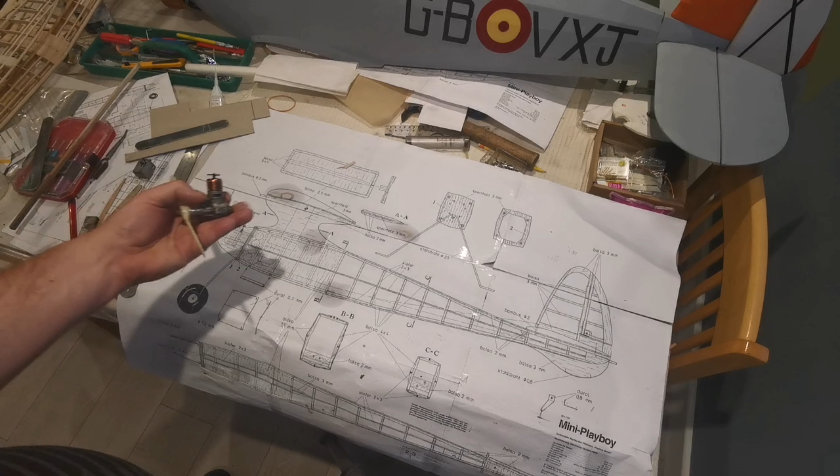It's time to start tackling the fuselage, and the first thing I have to do is decide the power plant. In this case I'd like to make use of this lovely little DC 0.75 Merlin. I've had this engine since I was about 15 or 16, and I'd like to make use of it as a nod to nostalgia.

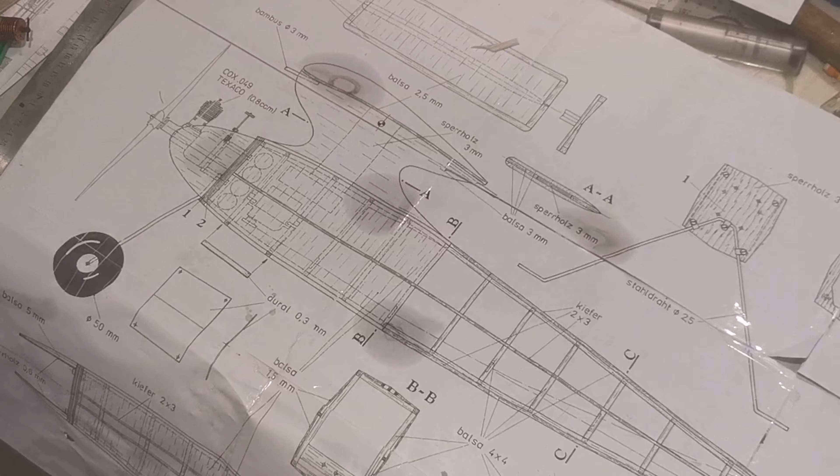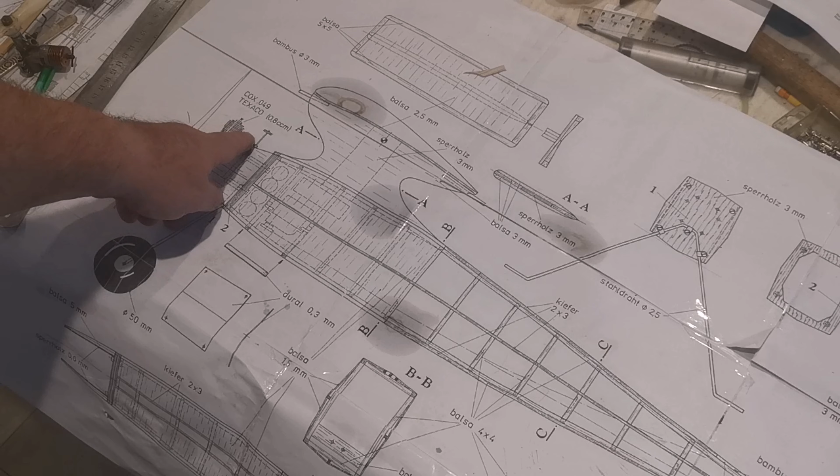The first issue is the design actually calls for a Cox engine of about the same capacity, but it's mounted from the rear. So the first thing I have to do is adapt this design to allow for some engine bearers to be incorporated, but it also has another clever trick up its sleeve - this whole front section that houses the undercarriage and the engine is removable.

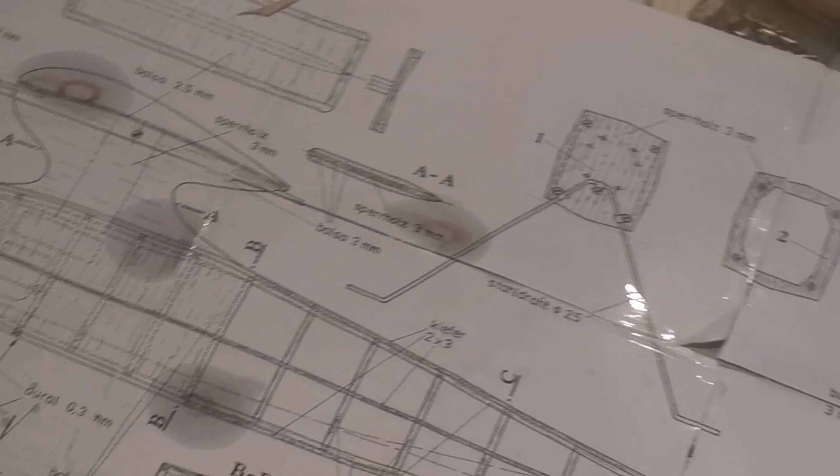If I swivel round a little and look at these formers - the front one which holds the engine and undercarriage, and the plate behind which has an access hole - this allows one to get into the plane for the batteries and other radio paraphernalia. There's a hatch on the bottom, and by removing this plate at the front, one can access the front of the fuselage to put the batteries in, I would think is the main issue.

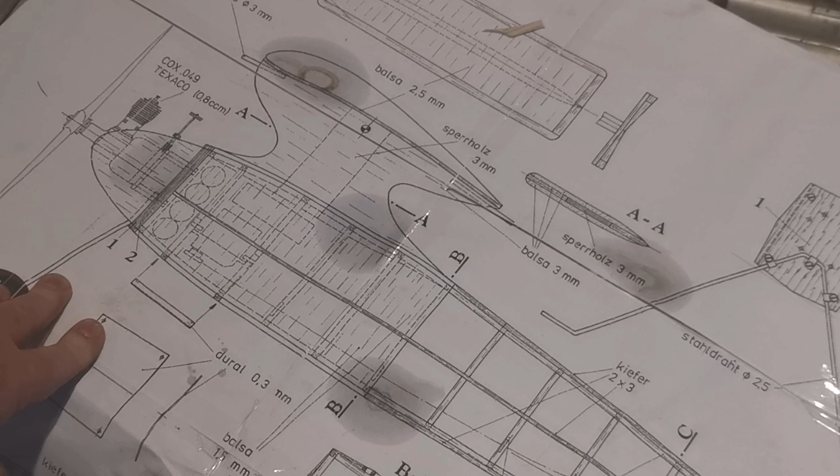That also means I can actually swap and change engines over quite easily. So what I'm going to do now is start hacking away at a few bits of plywood, and I'll show you my ideas on how I'm going to mount this engine in this design. Be back in a moment.

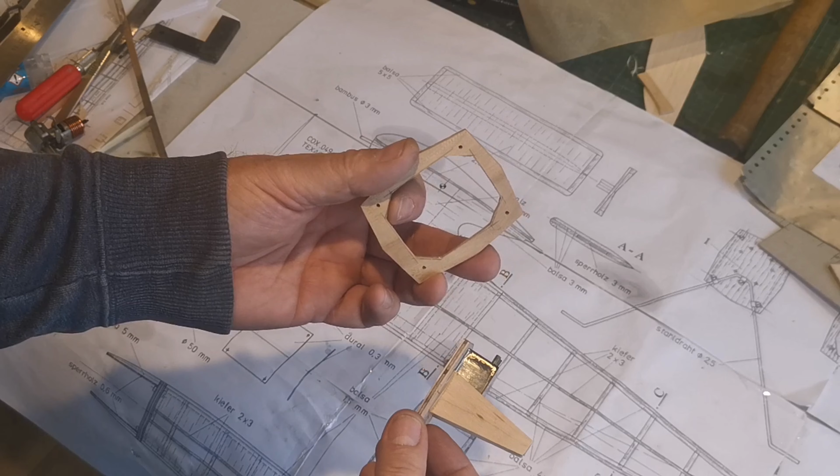Well, after a little bit of work with the fret saw, this is what I've actually come up with. Two plates together - this will remain as part of the fuselage, and there's an aperture there which will allow access to get in, for example, the receiver and the battery pack through the front. And this is the engine mount.

Hardwood bearers which are actually located through the firewall. Side cheeks to add some rigidity. It's all been clamped and epoxied. I'm making use of an ancient control line fuel tank that I soldered up years ago.

This will be retained onto the fuselage bulkhead with some T-nuts which I've just ordered, which will go through there, and the whole thing can be clamped onto the front like that. If I want to, I can beautify it and add bits and pieces to it. I might even just leave it quite utilitarian like that.

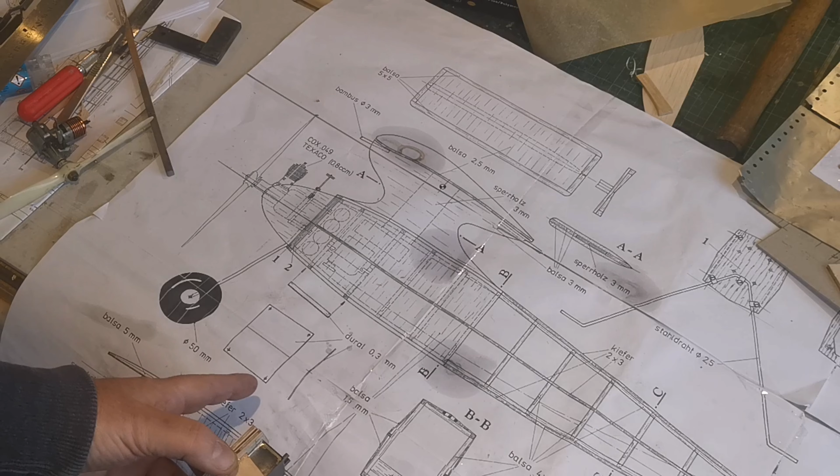If I ever need to change the engine, in practicality it only took us about an hour to do this. I would just make a different block to go on the front and then mount it on. So that's the solution - it means I can start this build next week, I hope. It's basically a stick frame structure. The weather once again doesn't look fantastic next week, so if you can't get flying, get building.